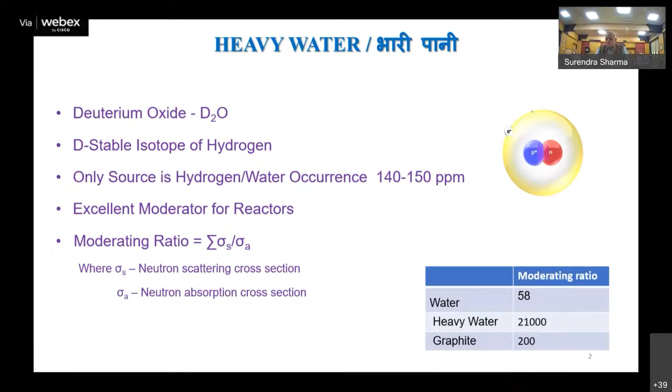Heavy water is a key input for supporting the PHWR program, which is a mainstay of India's indigenous nuclear power program. There, it serves not only as a moderator but also as a coolant.

Just to give you an idea of the magnitude of the requirement: a PHWR requires about 220 metric tons of heavy water. But subsequently there have been improvements in our own design of PHWRs, and there you need only 485 metric tons for a 540 megawatt unit. For the present avatar, the 700 megawatt unit, you need 525 metric tons. Smaller quantities are also required for makeups and non-nuclear applications.

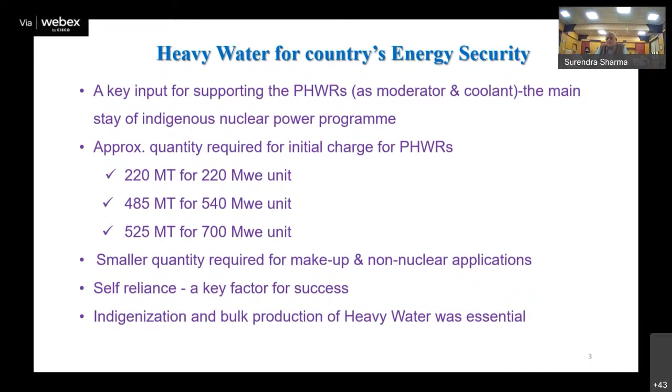Self-reliance was a key factor for the success of the program, and indigenization and bulk production of heavy water was the need. This was just to give you an idea of the magnitude of production required.

Heavy water was first prepared in a laboratory by Gilbert Lewis, an American scientist, in 1934, soon after the discovery of deuterium by Urey, another American scientist. Heavy water has a checkered history, but we won't get into that, because initially it was associated with the weaponry program. It's only later that it gained importance in the power production realm.

As far as India is concerned, on the dawn of its independence, in April 1948, Dr. Homi Bhabha made a visionary statement. I quote: 'Government should explore immediately the possibility of utilizing cheap hydroelectric power in India for manufacturing heavy water, on one hand for our own requirement in piles, and also on the other hand for sale to other countries.'

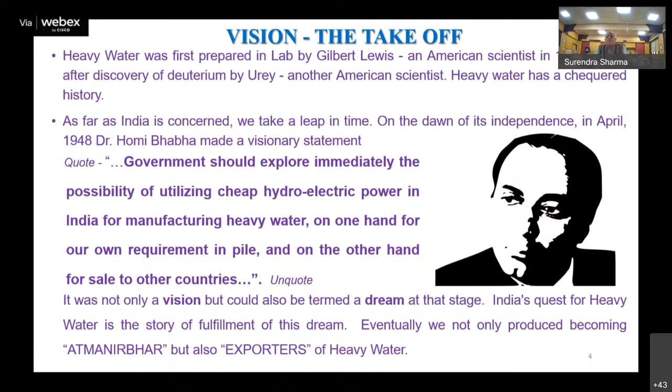But it was not only a vision, it could also be termed a dream at that stage. This whole story is really one of fulfillment of his dream, because eventually we not only produced heavy water and became Atmanirbhar, which is a mantra that DAE has a penchant for, but also became exporters of heavy water.

There are many methods for separating deuterium, like gas diffusion, but for large-scale separation, only certain technologies are generally employed. I've listed them out. Some of them are very good, but all have their merits and demerits, and you have to choose the right technology depending on where you want to set up the plant.

The first technology, which we have also employed, is electrolysis of water: when you electrolyze water, deuterium and hydrogen separate, and gradually the water becomes enriched in deuterium. This has a very good separation factor, and the advantage is that you can have unlimited feed throughput since water is the source, but it has a very high specific energy consumption and needs very large electric power. This has been employed in India for production of hydrogen at the fertilizer plant at Nangal, and that hydrogen has been used by us for producing heavy water.

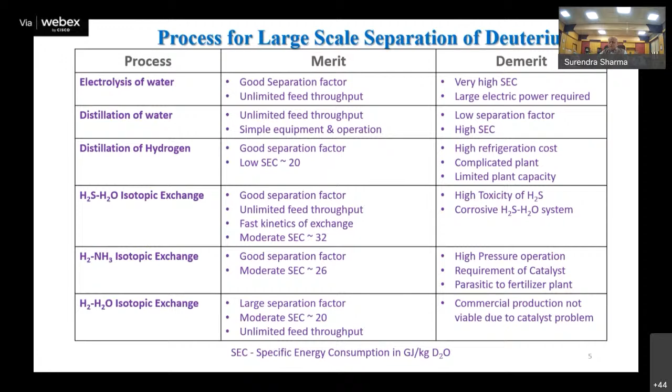I just want to show you the technologies that we have employed. Our first plant was at Nangal, which was based on distillation of hydrogen. Very cheap electric power was available at Nangal, so a fertilizer plant was set up there. They were producing hydrogen for their synthesis gas by electrolysis of water, and the hydrogen was being tapped for our plant and liquefied and distilled to get deuterium.

Then the other technology that we have used, which again is the indigenous one fully developed by us, is the exchange between water and H2S. Basically, the deuterium gets transferred into the liquid phase. At one low temperature, deuterium gets transferred into the liquid phase, and at a high temperature it gets reversed. In other words, H2S is employed - it circulates through the plant, picks up deuterium from the hot tower, and gives it up in the cold tower, where the liquid gets enriched and you draw the product.

Then we have a similar process, but employing ammonia and hydrogen. In this we have two versions. One is monothermal, where again the principle is the same - ammonia is used for circulation and picks up deuterium, which gets transferred to the liquid phase at a certain temperature. Another version of the same exchange process, like we have for H2S-H2O,

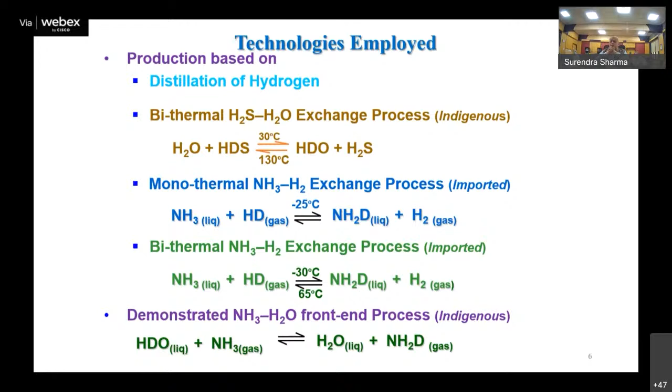Then actually, going back into the history a bit, in 1951 - I've already mentioned that in '48 - Dr. Bhabha dreamed of, he had a vision of producing heavy water, not only for our use, but also for export. So in 1954, Dr...

Bhabha mooted establishment of a heavy water plant at Nangal, the first technology I mentioned, in conjunction with a fertilizer plant. The fertilizer plant was based on production of hydrogen by electrolysis, as very low cost power was available. So a 14 ton per year heavy water plant was set up based on German cryogenic distillation of hydrogen technology. Hydrogen was being tapped from the fertilizer plant, liquefied and then distilled.

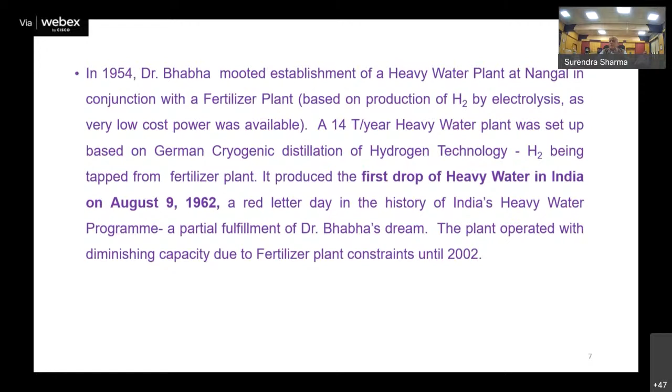This plant produced the first drop of heavy water in India on August 9, 1962. It's a red letter day in the history of India's heavy water program, a partial fulfillment of Dr. Bhabha's dream. The plant operated with diminishing capacities due to fertilizer plant constraints until 2002, when it was finally dismantled because it had done its life.

The production from the Nangal plant was much too meager to support the research reactors and India's indigenous nuclear power program, essentially based on PHWRs. Therefore, an intense drive was undertaken for augmenting production in the 1960s. A separate entity, Heavy Water Projects, was constituted in 1969 for this purpose. Incidentally, when the emphasis shifted from setting up projects to operating them, this unit was rechristened as Heavy Water Board.

That was 20 years later, in 1989.

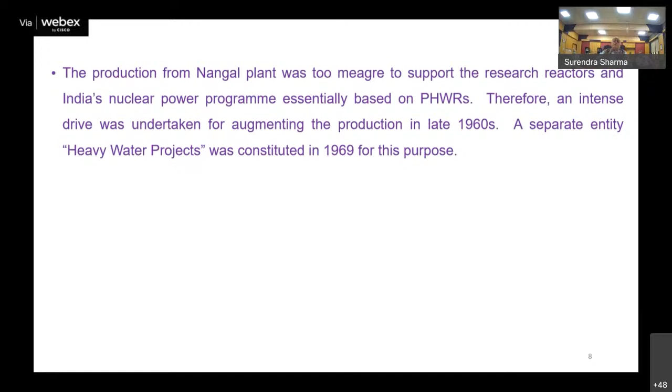Around 1968, a crucial decision had to be taken, because the nuclear power program was catching up while the heavy water program emphasis had come in a little later. So we were somewhat lagging behind the requirement. It was evident that if we didn't hurry up, we may become a bottleneck. So a crucial decision had to be taken as to the path for producing large quantities of heavy water to meet the growing demand for the nuclear power program.

On one hand, we had the indigenously developed H2S exchange-based technology, though proved only on a small pilot plant. On the other hand, an ammonia hydrogen exchange-based foreign technology proven on a plant scale, though only for a short while. It was decided to employ a two-pronged strategy: put faith in our own technology and build a plant based on it, while at the same time making use of imported technology for building other plants to ensure we catch up with the projected requirement of the PHWR program.

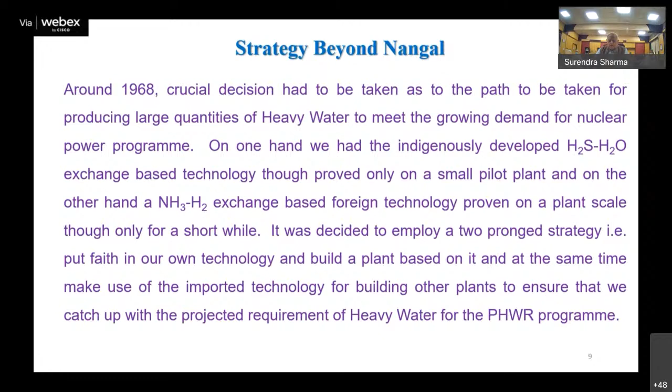So steps were taken to set up a 100-ton per year plant based on our own technology at Kota, and two plants of 67-ton per year at Baroda and 71-ton per year capacity at Tuticorin. These two were based on imported technology and had to be hooked on to fertilizer plants. This was done in quick succession between '69 and '71.

Then another plant of 62 tons per year capacity was sanctioned in 1972 for being set up at Talcher, based on the projected requirement of heavy water in 1982. But we had already started producing, and yet it was reviewed and found that we had to augment the capacity further.

So based on the projected requirement, in 1982 sanction was accorded for setting up a 185 ton per year H2S-H2O exchange based plant at Manuguru. That was virtually a scale up of the Kota plant, almost double its capacity, again our own technology.

Also a 110 ton per year ammonia hydrogen exchange process plant at Thal. These were virtually second generation plants, because we were already working on Kota and Baroda and all that, so we had learned quite a bit and were able to make improvements.

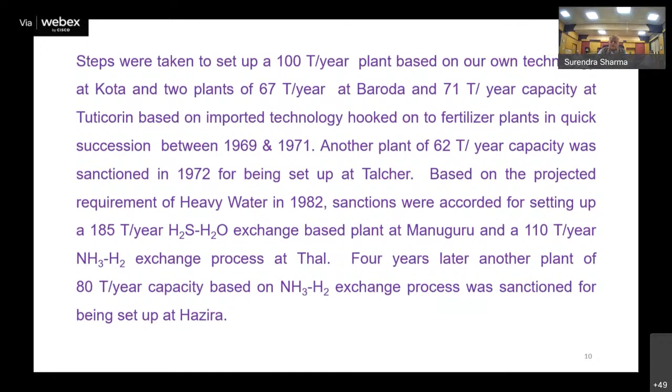Now, I have taken the liberty of dwelling a little bit on our indigenous technology because it's not that we did not work very hard on making the imported technology work, but as far as the indigenous technology was concerned, we faced a lot of challenges, and I want to mention those. The point was that we developed this on our own from scratch, as Professor Rao mentioned in the introductory remarks - we actually did the work from concept to commissioning.

It's not that we got the technology from somewhere and just worked on the concept - we did all the intermediate work of design ourselves. This process was known to be used elsewhere for production of large quantities of heavy water, basically in the US, but that was connected with their weapons program - producing heavy water for use in reactors for producing plutonium. So the technology was highly guarded and not much information was available. We had to develop it on our own, right from scratch.

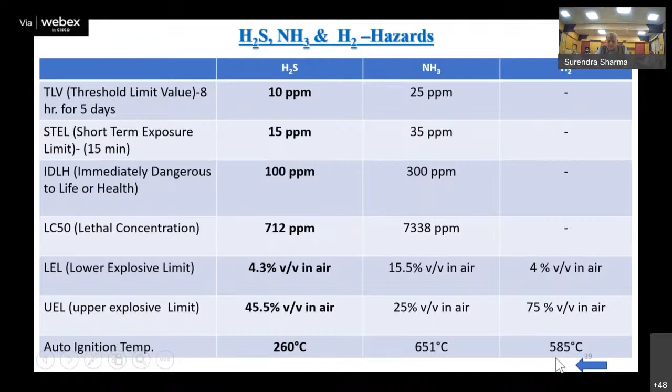Because of this, we had a lack of infrastructure. The toxic service was one prime consideration. As a matter of fact, our philosophy even today, when we are operating the plant, is that you have to take care of safety first, whether you produce or not - that's secondary. That was the kind of philosophy we used right from the beginning.

Now, it was a time when there was a complete lack of infrastructure and experience on part of fabricators and equipment suppliers. There were very few fabricators who could handle and fabricate clad materials - like in our service, we need carbon steel clad with stainless steel. At that time, there was not enough experience for this. Also, the suppliers of equipment for this specialized kind of service were not there; they were still under development.

Like the gas booster I mentioned - in the process, you have to circulate H2S gas, and this is a very large volume. The capacity of the gas booster would be something like 2 megawatts. Then you need special pumps with special seals, and you need vessels with special materials and special seals because you cannot allow any leakage of H2S, and also the service is very corrosive.

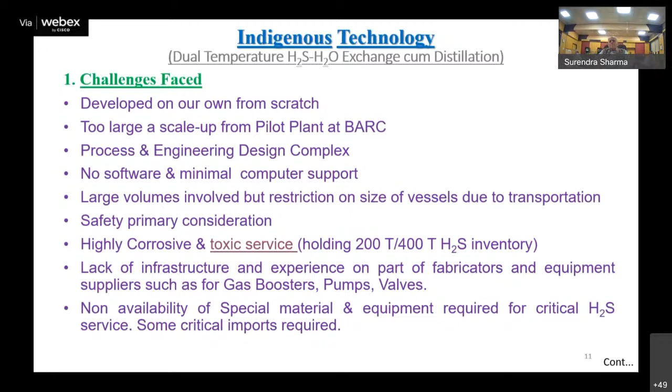So we had to do a lot of vendor development, but we also needed to import quite a bit of equipment and materials - that was a different story for our subsequent plants. That was an era where, as I mentioned, not only was there a need for vendor development, but we were also in an era of scarcity. Some of the old timers would remember that even the basics, such as cement and steel, were very scarce.

You needed a permit, you needed to have some kind of allotment - this is, of course, on the project side. And then, of course, there was a very big shortage of foreign exchange. We needed to import something, but foreign exchange was very scarce, and sometimes it was tied to specific country aid. So you may like to get equipment from some country which may be most suited, but eventually you have to import it from some other country because the foreign exchange is tied to that country.

A complete embargo got imposed on aid and exports to India as a sequel to our peaceful nuclear experiment conducted in 1974. It was a big blow to the Kota Heavy Water project schedule, because we were in the midst of the Kota project, but it turned out to be a blessing in the long run, because the program shifted - more emphasis came on going in for more indigenization and more intensive vendor development. It was a blessing in disguise, because the setting up of the next plant became much easier.

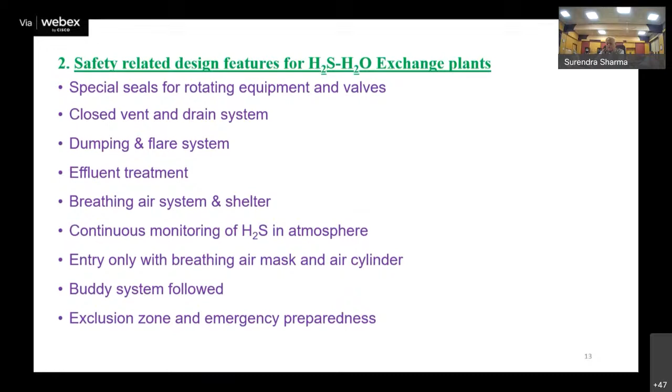And of course, you have exclusion zone and emergency preparedness plans, which is common with the other nuclear plants. But the H2S entailed quite a big burden on the design, and a lot of features had to be built in.

Now, another very special feature for this process is its very long equilibrium time. You see this building up the concentration from 150 ppm to around 15%, which we do in the exchange unit, and further, of course, we are doing it in the distillation unit. The bulk of the work for separation is done in the exchange unit.

To build up the concentration to 15%, you need uninterrupted operations for 24 days. If you have an interruption, a trip, you're back to square one, and then you produce nothing. Of course, subsequently we have devised ways and means to salvage the situation. But the important point is that all your equipment, all your procedures, have to be very reliable.

Because you don't want any interruption. And of course, there are other fine points you have to control, L by G ratios, etc.

Another headache in the operation is that, all said and done, you provide certain ways and means so that your corrosion is minimized. But if you don't have very good control on your water quality, the sulfur may get precipitated. There will also be some corrosion products. They get carried over to certain parts of the plant and choke the lines and create problems. So not only do you have to take care in the operations, you also have to have very proactive maintenance.

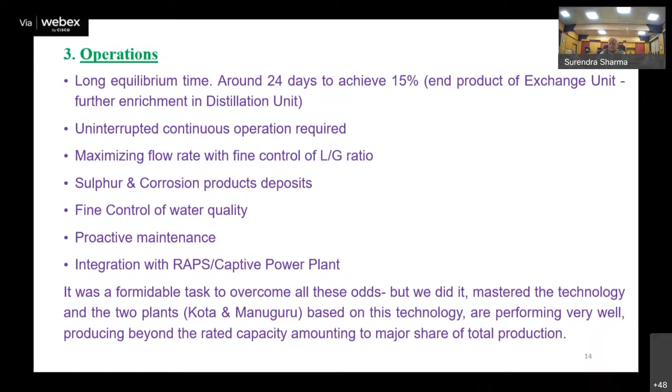So at the Manuguru plant, we provided a captive power plant. All these were really a formidable task to overcome all these odds, but we did it. We mastered the technology, and the two plants at Kota and Manuguru, based on this technology, are performing very well, producing beyond their rated capacity, which amounts to the major share of the total production. So that's for our indigenous technology.

Now, I just want to mention how we happen to get to Kota and got integrated with RAPS. You see, way back in the 1960s, preliminary work had been carried out on conceptualizing a 200 ton per year capacity plant based on H2S-H2O exchange process, our own process. It was to have two streams of 100 ton per year each, and a captive power plant based on coal and steam cycle, integrated with a heavy water production unit.

Coal was the cheapest source of energy at that stage, so we were looking for sites to locate it on the pit heads of the coal mines. Later, it came to light that RAPS 1 and 2 at Kota were capable of generating about 10 to 15% of extra steam over the rated capacity. Thus, steam, the main source of energy for the process, could be available at a very low cost.

However, that low cost means an incremental cost. It was almost like 2.5 rupees per million BTU, which is really a very low cost of energy. However, the quantity available was adequate to support only a 100 ton per year plant.

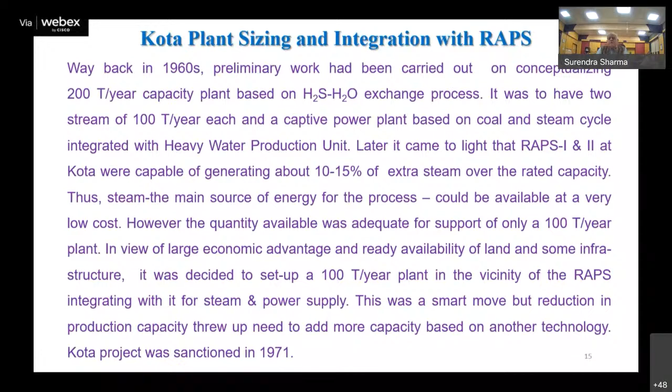In view of large economic advantage and ready availability of land and some infrastructure, as compared to setting up a greenfield project, it was decided to set up a 100 ton per year plant in the vicinity of RAPS, integrating it with it for steam and power supply. This was a smart move, but reduction in production capacity threw up need to add more capacity based on another technology.

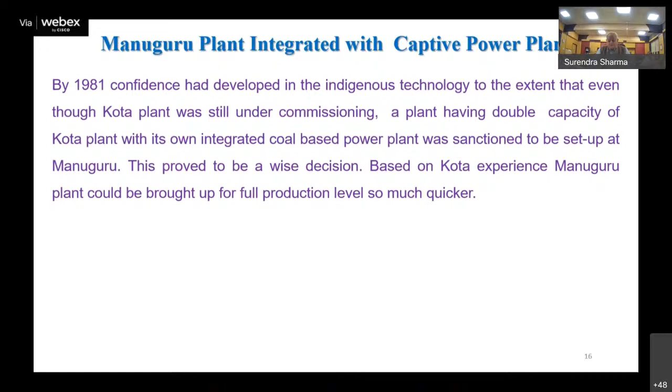Kota project was sanctioned in 1971, and we went ahead with a 100 ton plant. Subsequently, by 1981, confidence had developed in the indigenous technology to the extent that even though the Kota plant was still under commissioning, a plant having double the capacity of Kota plant, with its own integrated coal-based power plant, the original concept, was sanctioned to be set up at Manuguru. This proved to be a wise decision, because even though Kota was not completed, it worked out well, and based on Kota experience, the Manuguru plant could be brought up to full production level much quicker and much better than what has been done in other plants in other countries.

Now, as far as imported technology is concerned, that is the ammonia-hydrogen exchange based technology, I just want to give you a slight historical perspective. The French Atomic Energy Commission had developed this process in collaboration with a coal company. They set up a 20-ton per year heavy water production plant in conjunction with a fertilizer plant in 1968. It worked only for a few years because it was hooked onto a fertilizer plant and there was an explosion there. It took a very long time to rehabilitate it, but they didn't restart the heavy water plant because I think they did not need heavy water anymore.

So as an Indo-French collaboration, this technology was offered to India through a consortium named GELPRA, which comprised French companies having experience in process, engineering and construction. In 1969, HWP, excuse me for using HWP somewhere and HWB elsewhere because they were both synonyms, HWB signed a contract with GELPRA for a turnkey supply of a 67 ton per year capacity heavy water plant, to be set up at Baroda in conjunction with Gujarat State Fertilizer Company, which was employing a high pressure technology, about 600 kg per centimeter square. So it was a turnkey project and all the equipment was to come from there, but we persuaded them to procure low pressure equipment locally.

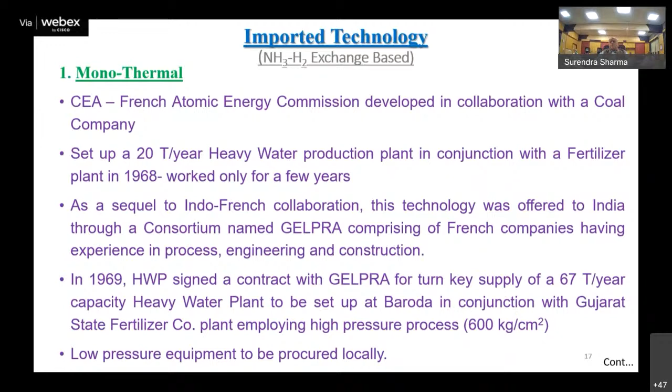Two years later, as I mentioned, our own technology plant at Kota had been pruned down to 100 tons, so there was a need to augment the capacity. So another two years later, in 1971, a similar contract was signed with GELPRA for another plant, that is at Tuticorin, with a capacity of 71 tons per year, in conjunction with the SPIC fertilizer plant employing lower pressure. So this became a little better, much easier plant. Here we had more of an indigenous component and more of our Indian participation.

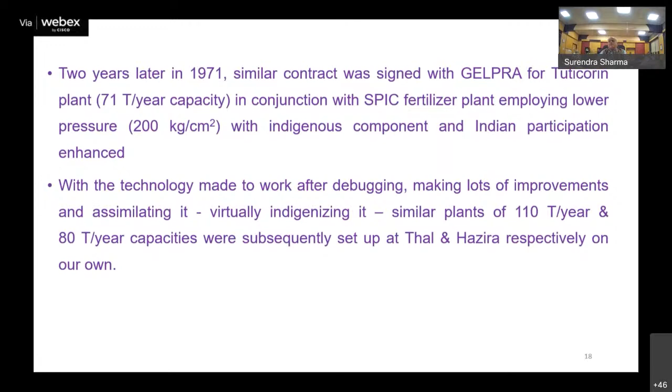Well, with the technology made to work, I'm again doing a little jump in time, but with the technology made to work after debugging and making lots of improvement, it was a big struggle assimilating it. I'll take the liberty of saying that we virtually indigenized it. So similar plants of 110 ton per year and 80 ton per year capacities were subsequently set up at Thal and Hazira respectively, on our own. Here we virtually did it on our own.

Now, something I want to mention about the Baroda plant. This process of ammonia-hydrogen exchange became possible because of a breakthrough, and that was because some very specialized, and I would say amazing type of trays, known as ejector trays, were developed. This led to the process being adopted for an industrial plant built at Mazingarbe, France in 1968. These ejector trays employed canned motor rotor pumps inside the exchange towers. We had to have penetrations in this high pressure equipment. The electrical cables had to be passed through for running the pumps. Each stage was about 2 meters high, and the liquid had to be pumped inside. So this also needed special glass seals for cable entries, which again was a very fascinating engineering feat.

Then the Baroda plant faced a large number of major problems during commissioning and operations, some process related but mostly equipment related. Even though it was a similar plant to the one set up in France, perhaps the Baroda plant needed much higher pressure, and also the equipment that the vendor GELPRA chose perhaps lacked certain integrity or whatever it is. It took a very long time and was a very big struggle to make the Baroda plant work.

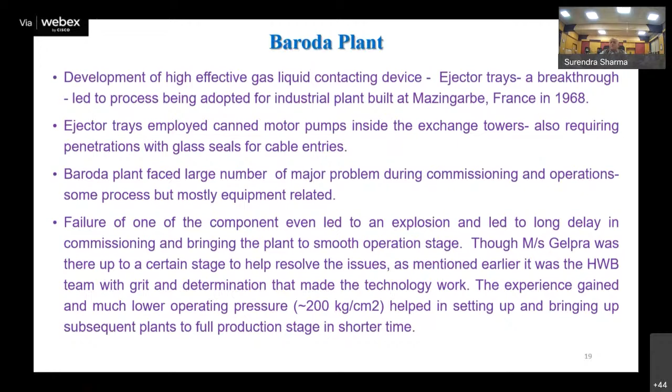The experience gained and much lower operating pressure, about 200 kg per centimeter, helped in setting up and bringing subsequent plants to full production stage in shorter time, because the other plants were hooked on to fertilizer plants using lower pressure technology. This was the ammonia hydrogen exchange monothermal process, but there's also a version of the same exchange that is bithermal.

Around 1971-72, there was an urgent need to augment heavy water production beyond the projected total capacity of Baroda, Kota, and Tuticorin plants, some under construction and some producing. Though the heavy water project preferred the familiar French technology at that stage, an alternate became available: a bithermal ammonia hydrogen exchange process for production of heavy water developed by UHDE, a German company. It offered lower energy requirement as well as simple design and equipment more amenable to indigenization.

After due scrutiny of the process and offers from GELPRA and UHDE, it was decided to go for the UHDE proposal. The project was sanctioned in 1972. The plant was set up at Talcher in conjunction with FCI's fertilizer plant, which was based on a new coal gasification process. Because of the oil crisis, India had gone in for two fertilizer plants based on this new coal gasification process. Unfortunately, those were not very successful.

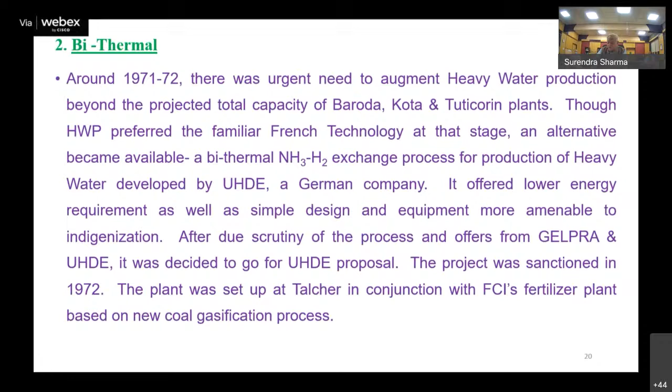As the source of deuterium is in hydrogen, which forms part of the synthesis gas, these plants need to be integrated with fertilizer plants, hence are parasitic in nature. This I had already pointed out. Their capacities get determined by the quantity and quality of synthesis gas available. Any change in parameters in operation of the fertilizer plant affects performance of the connected heavy water plant.

HWB has been meeting these challenges and devising means to minimize the effects. However, in case of the Baroda plant, heavy water production had to be stopped after about 2 decades due to the coupled fertilizer plant switching over to another technology, with feed to the heavy water plant becoming incompatible. In case of the Talcher plant, the coupled fertilizer plant hardly worked to its expectation, leading to a similar fate for our Talcher plant.

The production at the Tuticorin plant had to be stopped in 2007, after about 3 decades of operation, on account of the coupled fertilizer plant stopping operations because their production based on naphtha had become unviable. Well, fortunately, it is now under revival as the coupled fertilizer plant is resuming operations.

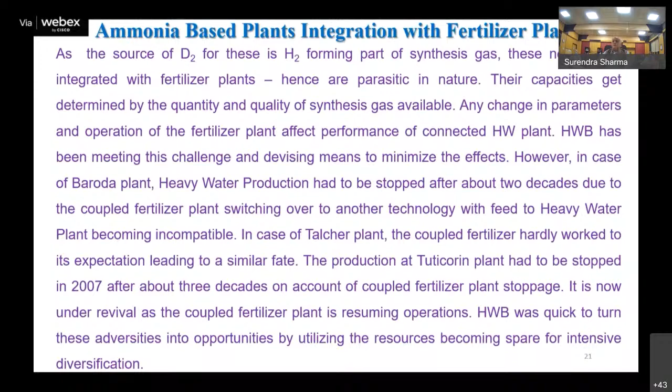Now, I just have been mentioning various names of the plants. I just want to show you the location. We had the first plant at Nangal, right on top. I think we have this, you could point that out. Nangal.

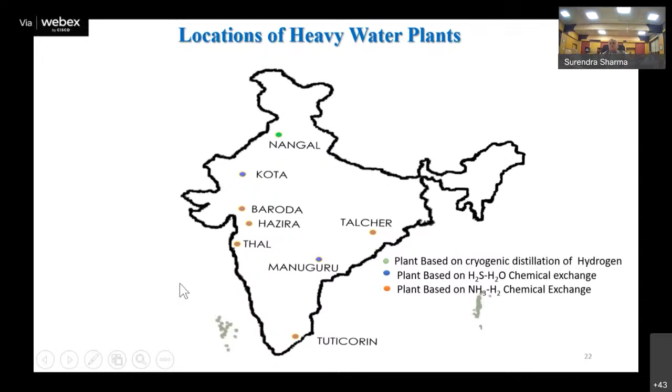Tuticorin is also to be treated as a first generation plant, down south. As I mentioned, production of heavy water at Baroda, Tuticorin, and Talcher has been stopped. We are no longer producing heavy water there, and we are utilizing the facilities for diversified products which I'll talk about.

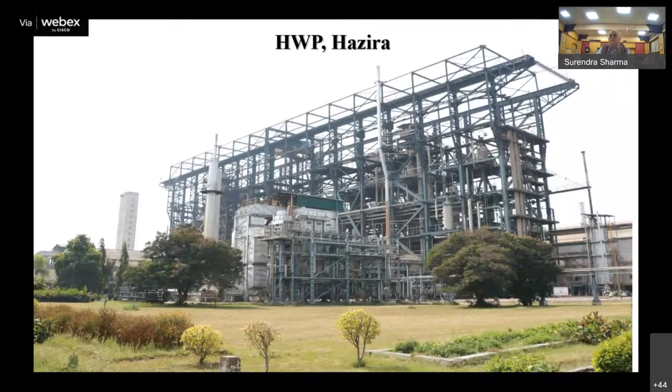Then we have our second generation plant, which we built almost entirely on our own, ammonia hydrogen based, the last of such plants. And this is the plant at Manguru, a scale up of the Kota plant, but with the big difference that it has its own integrated captive power plant, with the steam cycle fully integrated. That gives us great flexibility and better energy consumption. I would call this the crown of our whole program, the largest producer, and a very steady, very good workhorse.

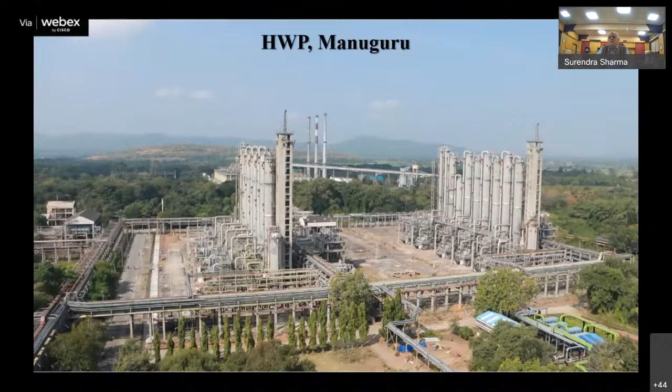Having already mentioned this, to recap, this is how we built up our capacity over a period of years. This is the installed capacity, not the production. Production is another matter altogether, because there are certain other factors. We started with Nangal, 14-ton capacity, which was tuned down later on.

Then we added Baroda in 1977. Soon after that, Tuticorin, 49-ton capacity. Then we added Talcher, and Kota started producing in 1985. Then Thal, another 78-ton plant. And then we added Hazira and Manguru.

This was the zenith, you could say, of setting up the new plants, and this was the maximum installed capacity. Soon after that, we had to suspend production at some of the plants, such as at Talcher, because the linked up fertilizer plant never worked properly, and subsequently they stopped it altogether.

We found that our operations were no longer viable, so this was the first one to be taken off the line, but also the pioneer in starting diversification activities. Most of the solvents technology was developed there.

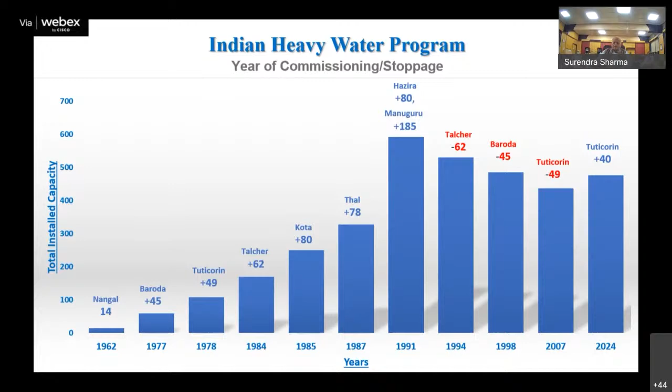Time constraint does not permit coverage of the very special features of construction and commissioning, which was also a very challenging and interesting time, because these plants were being set up for the first time in India, and there was not enough infrastructure.

However, I'd like to share details of one particular unique feat, and I call it a feat because it really was a great one, related to the transport of the main isotope exchange tower of the Baroda plant. This was a 2.5-meter diameter, 30-meter long, 330 millimeter thickness, about 13 inches, multi-layer high-pressure tower weighing 530 tons, fabricated in France.

It was brought as deck cargo on a special ship which anchored in the sea off Bhavnagar port, the nearest port. At the specified high tide, it was lowered onto two self-propelled crawlers on a pontoon barge, which was towed to a specially prepared jetty at Mujpur. The crawlers rolled out onto the land for its journey to the project site, 42 kilometers away, through some villages and part of Baroda town. The total weight of the tower and crawlers added up to 700 tons.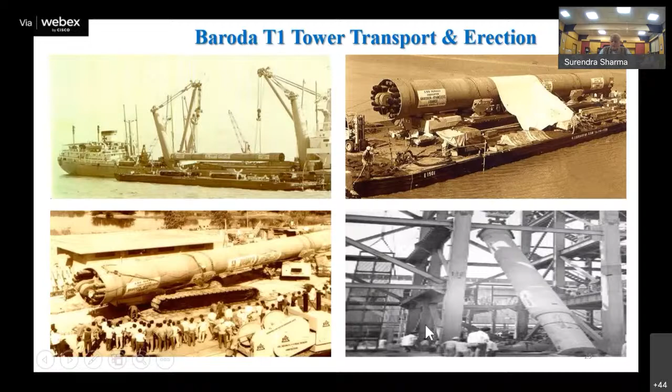Having set up all these plans, initially we were under tremendous pressure to produce because we were late starters and there was a prospect of becoming bottlenecks for the whole program. So initially we had a mantra of producing at any cost. We were making all efforts, not bothering about cost. We had to produce, and produce.

But once we started producing and became comfortable with the stock position, our mantra changed. Now it was to produce at the lowest cost. So we started looking afresh at all our systems and plans, examining everything. It was a tremendous effort spread over a long period of time, because a lot of schemes were devised which needed to be implemented and systems modified. But it was, I would say, a tremendous effort yielding a very big result.

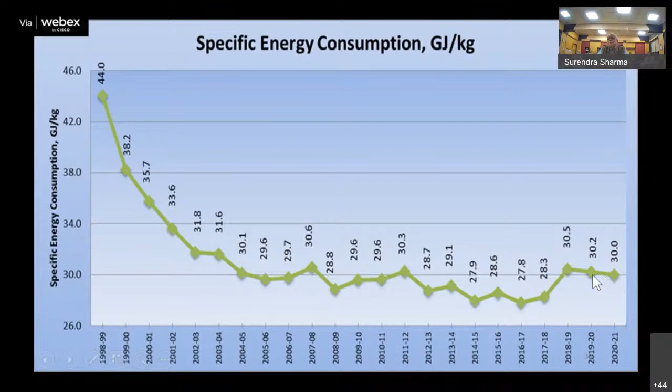You can see that from the specific energy consumption, this being the average of all the plants. From 44 gigajoules per kg, it came down to 30 - a reduction of about 30%. We do take great pride in this exercise.

Similarly, being concerned with the environment, we were also looking at other aspects, and here too we brought down our specific CO2 emission in heavy water production - that is, carbon footprint - by 45%. I'm only mentioning the carbon footprint, but we did a lot of other work, like making some of the plants zero discharge, conserving not only energy but also taking care of the environment. This was another big effort, but it came in only once we started producing and meeting the demand.

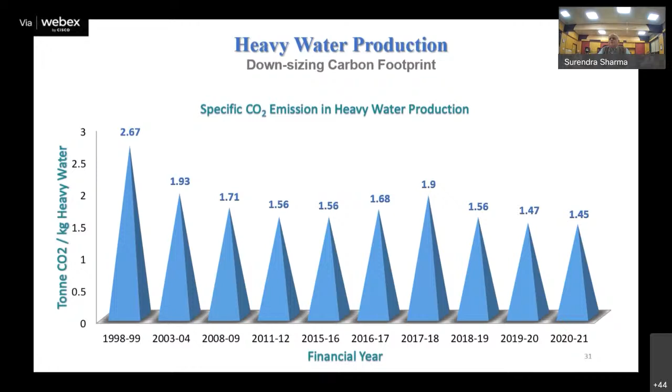Then, as I mentioned, out of necessity - because we had to stop production at some of the heavy water plants - we got into diversification. This has been quite a great effort. What we have done is take up the materials required in the nuclear field for making the country self-reliant. We have developed technology for several conventional and specialized solvents.

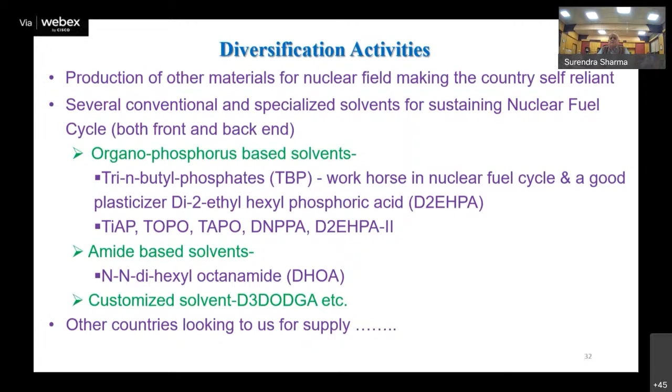Part of the technology was developed in BARC. Heavy Water Board has been specializing in transforming any technology developed, or initial work done, into a plant and bringing out production. So we took up several conventional and specialized solvents for sustaining the nuclear fuel cycle, both front and back end. This included organophosphorus-based solvents, amide-based solvents, and a lot of customized solvents. We have now come to a stage where other countries are looking to us for supply of these things, which is again a mantra of Atmanirbharta, and we are exporting them.

Then we have also worked on recovery - this is all adjunct to the effort that came up because heavy water production was stopped somewhere. So it becomes a story related to heavy water; the story is not complete without mentioning these things. We have developed a prototype and set up a prototype demonstration plant for recovery of uranium from phosphoric acid, which is extensively employed by fertilizer plants, and plans are on hand for setting up a production plant.

And of course, if we can do it for uranium, there are other rare earths also we can deal with. Then boron-10, that also we have taken up. We are producing boron-10, which is needed for fast breeder reactors and also for neutron counters. I think we have also supplied some of these to France for their research work.

Then, we already had expertise in producing potassium at the Baroda plant because that is needed for our catalyst. So we started foraying into production of nuclear grade sodium, which is required for fast breeder reactors. The technology has already been developed, and now we are in the process of setting up a 600 metric ton per year plant at Baroda. Then another important product that we have made is oxygen-18.

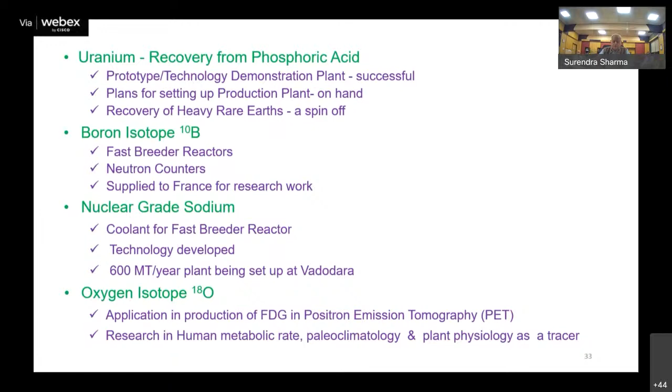Being in heavy water, we are virtually the sole supplier of deuterium. Deuterium is a very charismatic isotope - it's actually a substitution of hydrogen. With deuterium, it alters the properties of its compounds, making it very good for applications on the non-nuclear side, including life sciences.

It is used as a protective, preservative, and pharmaceutical material. It has applications in so many advanced technologies like information technology, electronics, laser technology, optical recording, isotope hydrology, NMR spectroscopy, and many tracer studies. We are supplying appropriate materials for all of the above.

Examples include deuterium depleted water. This is a very fascinating product, said to have great advantages for cancer therapy. It's not a treatment, but it is for therapy. As far as we are concerned, it is still work in progress, but elsewhere it is becoming quite popular. In India too we are working on it, and I foresee great demand for this coming up. It also has a lot of other good effects on health.

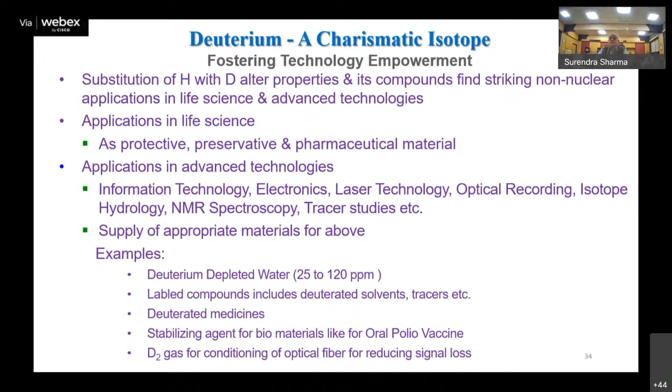Around the early 1990s, India had become very comfortable with regard to heavy water stock position and decided to foray into the export market. South Korea required large quantities of heavy water for their PHWR type power reactors. We responded to their tender but were virtually thrown out of the race, as they did not believe India could produce heavy water to meet their requirement vis-a-vis quality and quantity. I might add that we were virtually humiliated because they started showing us unfriendly press reports which said heavy water runs into heavy weather and things like that.

Well, we came back. Then came a second tender. We responded to that also, but backed it with a changed strategy. We decided to throw open our facilities, which so far we had been keeping more or less under wrap - we were not very open, not showing it to many people. We managed to win an order for supply of 100 tons of heavy water against stiff international competition, with the proviso that the order would be confirmed only after they visited our facilities and were convinced.